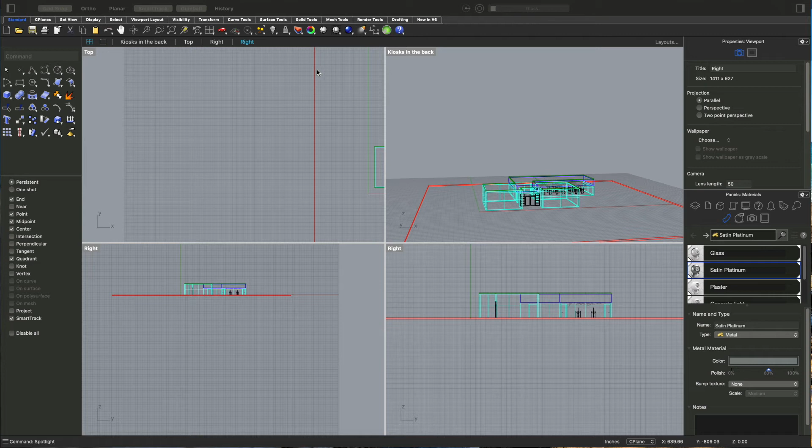All right, so let's do the next part of the gallery. I've got my windows set to show all of my orthographic views so that I can see everything. I'm going to start with the basic spotlight pattern in the back, and then I'll do the fabric overlay.

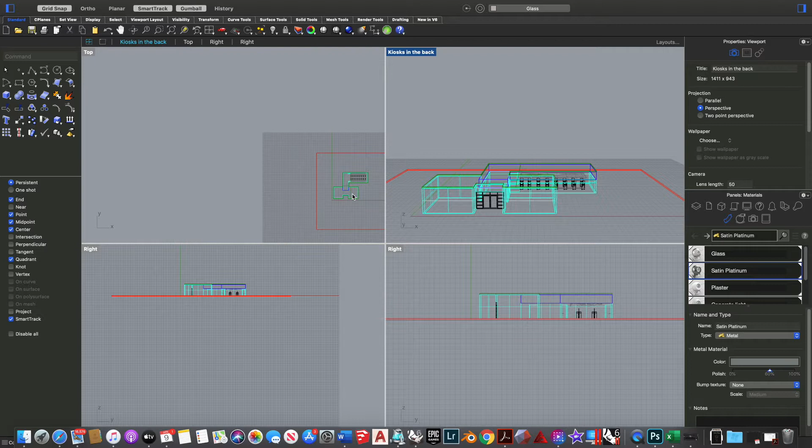So from a top view, I'm going to go ahead and hide everything by selecting it all. Then I'm going to make my spotlight, and bring everything back and move it into position. Spotlight, we type it, and we can adjust a lot of things later on if we want to.

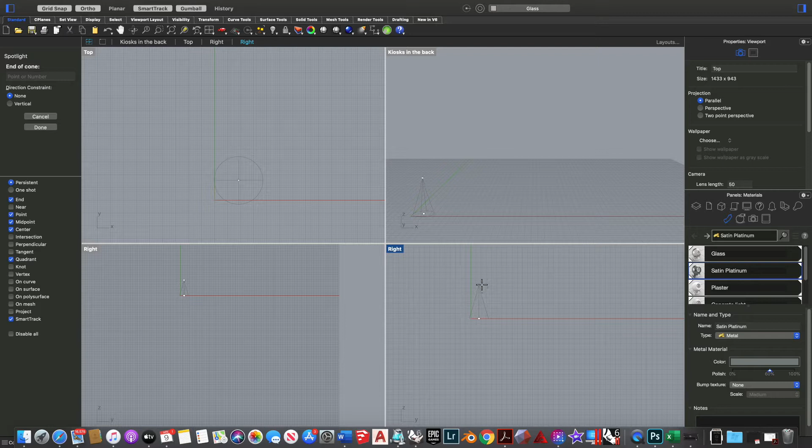I'm going to drag it out a certain distance, making sure ortho is turned on - up here for Mac, down here for PC. Switch to this view so I can get a straight forward spotlight. We can see that shape of it because we're in wireframe. If I click on it, now I can rotate my spotlight. If I turn ortho off, I can kind of tweak it a little bit down.

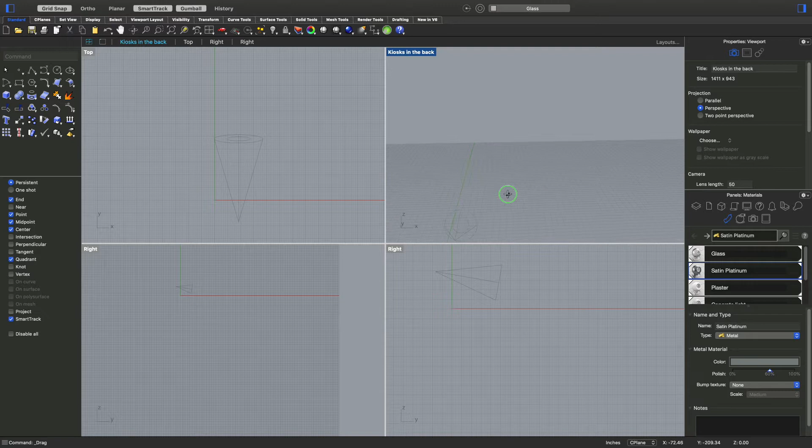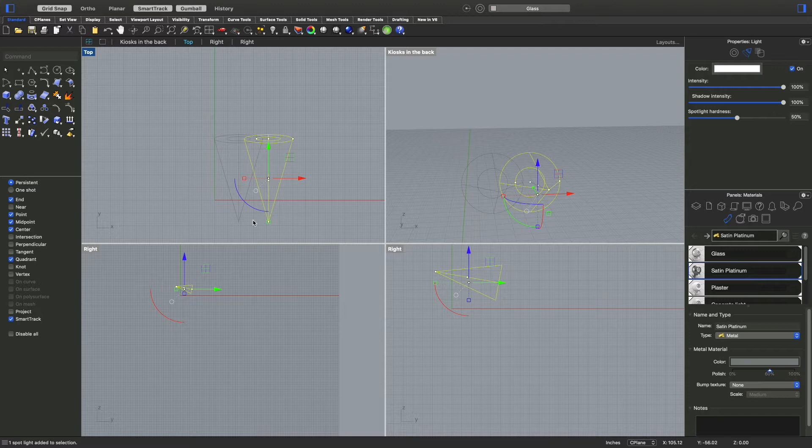Looking at it in perspective, now I want 3 of these, and I want them to cross beams. So I'm going to copy and move with ortho on - I just hit shift to make that happen - and put it about that far apart. Then I'm going to mirror this one over so I know it's the same. I'll select it and type mirror.

Go to my point here because my snaps are on. With ortho on, it should flip nice and straight, and click. Then I want these beams to cross right there, so I'm going to select this one and use my gumball to rotate.

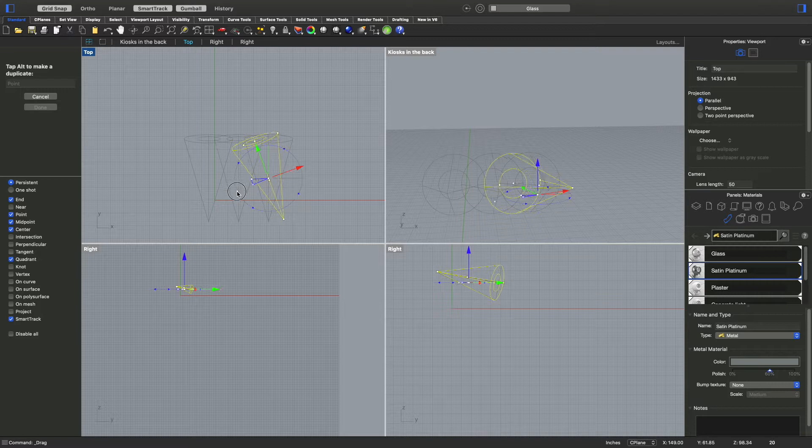I guess I could just delete this one - I should have mirrored that one afterward. So now I'm going to move it over. I want those circles in the center to overlap. Those are going to be kind of our hot spot.

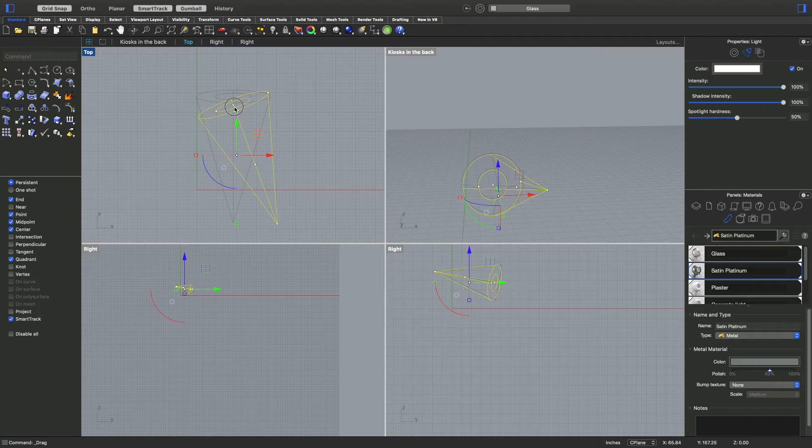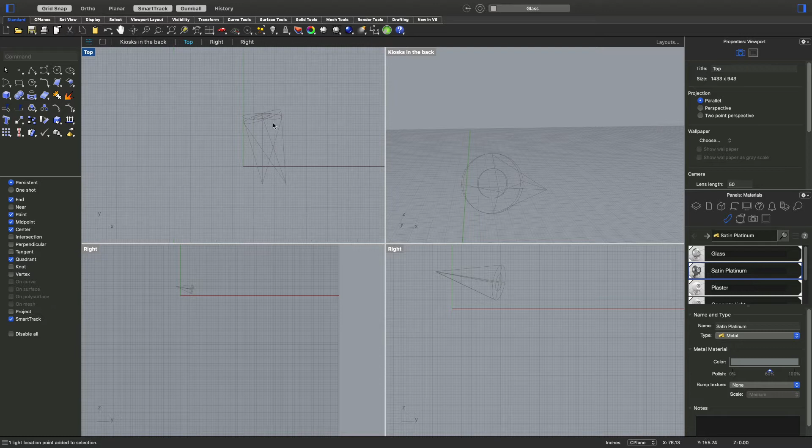I'm just dragging this single point by clicking, then clicking on just that point, and then I can move it because I want the distances to be the same. If I click on this, I can move these in to make it a really narrow focus, which later on I might want to change. We'll see how it works when we render it.

Now I'm going to mirror this over. This base point right there, and click.

While I've got them here, I'm going to go ahead and change the colors. Click on one, and then under properties - so properties looks like that right there - my intensity is way up.

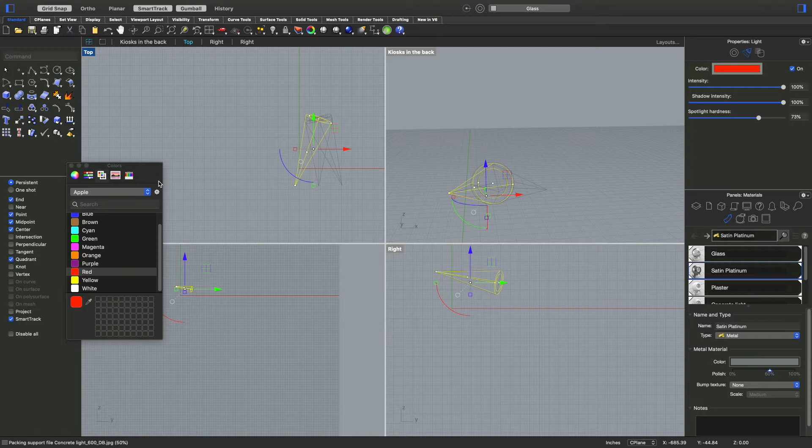I'm going to go to web colors here, basically, or just primaries. I'm going to do red, green, and blue. This one I'm going to make red. This one I'm going to make blue, I think - there's an order to it, I don't remember what it was, but we'll figure it out if it's not working. Since it's RGB, why don't we just do red, green, and then blue here. So that's blue, that's green, and that's red.

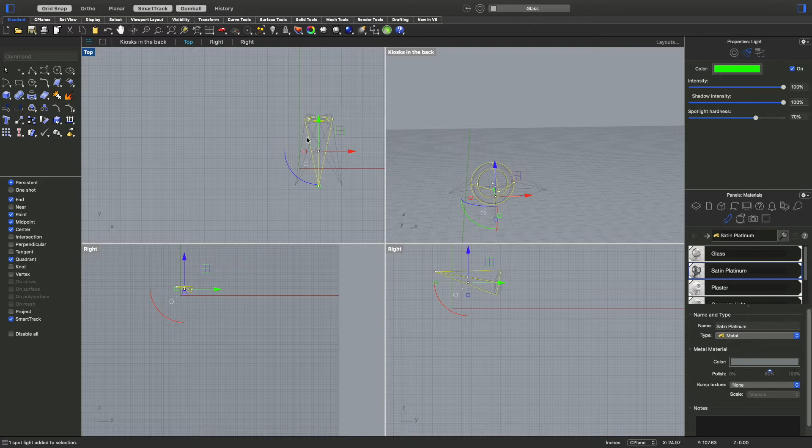All right, so let's now select these and put them on a new layer. I'm going to call this layer LightEff. Change the color, make it that green.

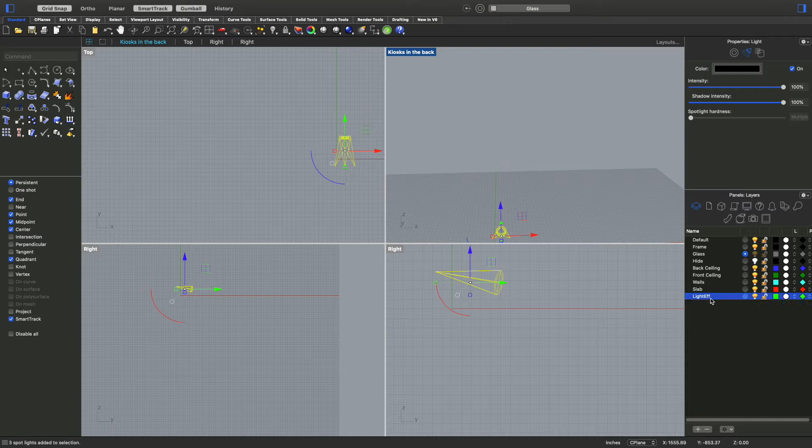Got to remember to move them to that layer. So select it all, right click, and move objects to this layer, or copy objects to the layer - I think that's what it says on the PC. Something different though.

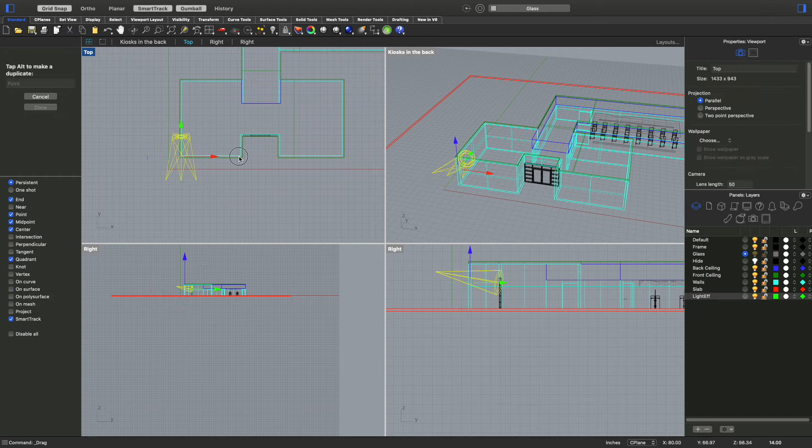All right, next we're going to bring everything back by right clicking there. From our top view, select these 3 objects, and I'm going to move them to the back of the gallery. Rotate - whoops, I'm going to type 45. Oops, 90, sorry. Oh, and then 180 to flip them all the way back around. Okay, there we go.

All right, so I kind of want them hitting the wall, and then I'm going to actually scale them in some.

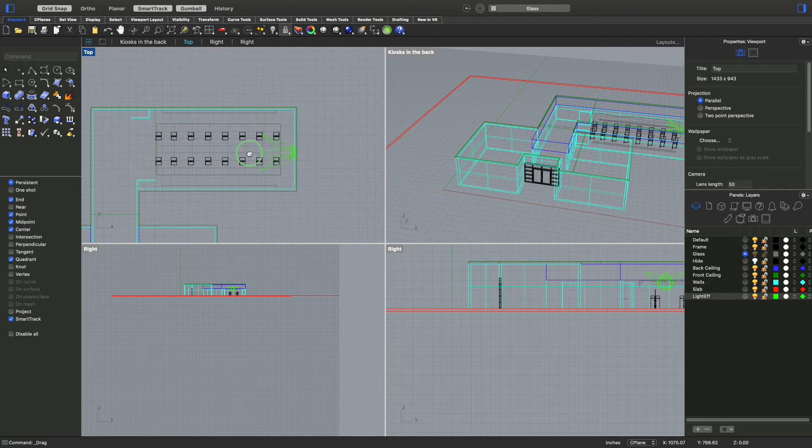All right, now I'm going to look at them from the front view because, yes, we can see that they're way up in the ceiling here. So let's select these and move them down to about right there.

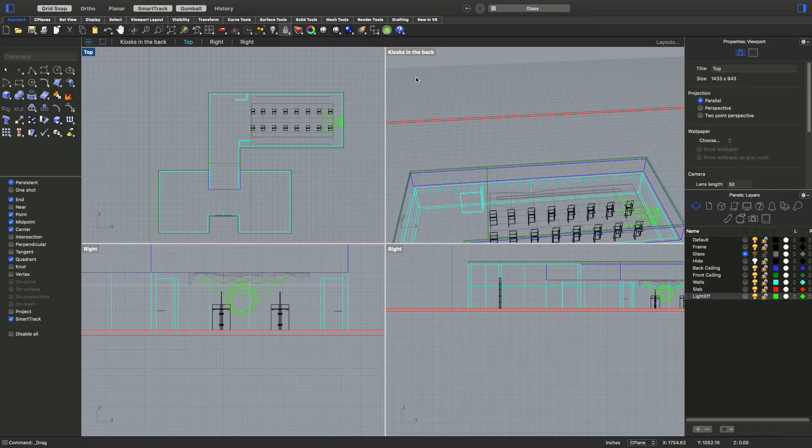Okay, awesome, so that's making those lights. Let's go ahead and see how they look. I'm going to go to my kiosks in the back view, to my camera here, which I've got set up as a view right there. I can just manipulate it.

Oh, and I realize I don't have this on a different layer yet, so let me just fix that real quick.

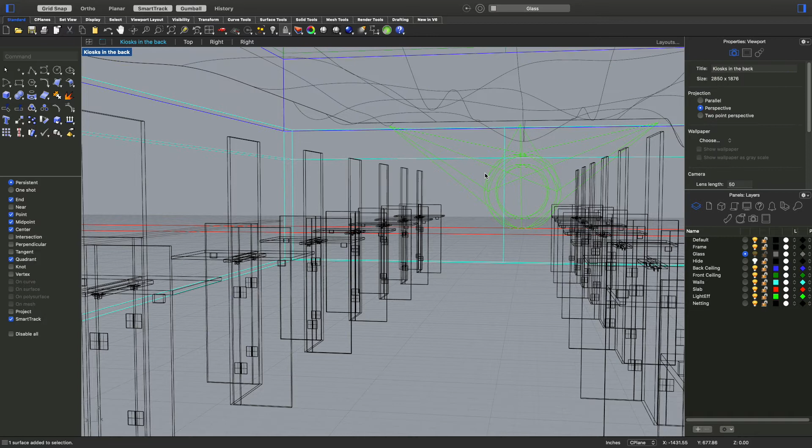All right, now let's switch to rendered view and see what it looks like. And it does look like we have a white light pattern back there.

Okay, I'm going to go ahead and try rendering this and see what it looks like. Let me just show you my render settings real quick, under render properties here. So we can lower this down, maybe do 100 DPI, and background solid color's fine.

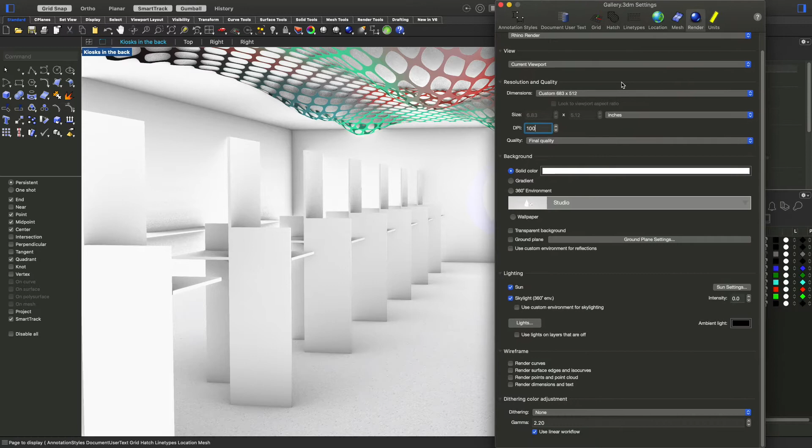Ground plane, we don't need that because we already have a ground plane, so I'll turn that off. I'll leave the sun and skylight on. All right, let's give those settings a try.

Okay, so after rendering it, I noticed we had some issues to fix. I came back in and decided to change some parameters, so I moved the lights closer together and scaled them in a bit individually. Then under properties I changed the intensity down a little on the red, shadow intensity to a midpoint, and spotlight hardness I put all the way up, which makes it almost like a focused light.

Then we want to make sure we've got the green at 100% intensity and the blue. You've got to play with the intensities a little to get the effect you want, but shadow intensity at 50 and spotlight hardness all the way solid there.

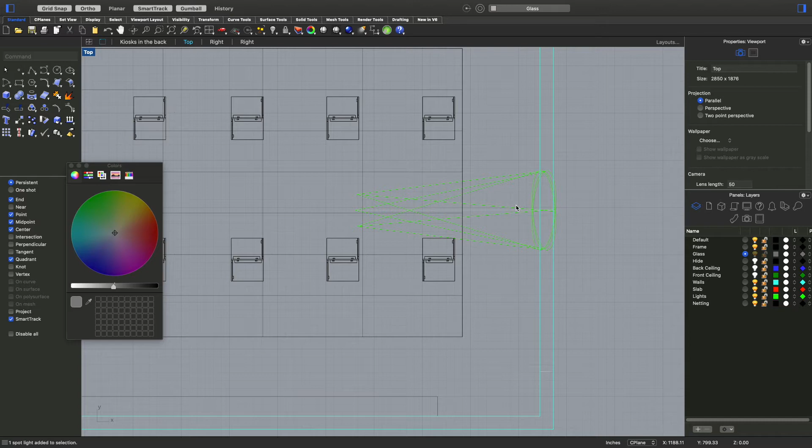A lot of these lighting settings that we're talking about do carry over to different programs, which is good, to make you think not just about using Rhino, but using any other software in the future.

So let's go ahead and add a little bit more lighting. I'm going to add a point light and put it right here at this end point, then move it to the middle here, middle-ish.

Then I'm going to go to a right view, and I want to make sure my point light shadow intensity is a little bit lower so there's more gradation in the shadows.

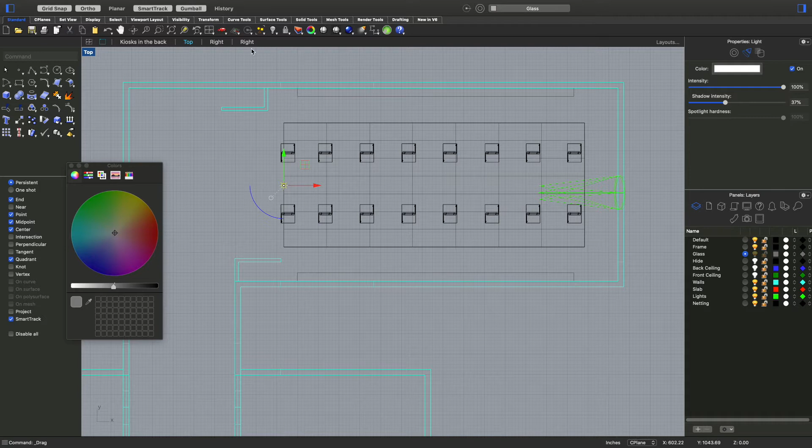Let's go back to a top view—sorry, let's go to a right view here. The other thing we want to make sure is that it's below the level of our draping net. We could put some more up in the net for cool reflections, but I'm just doing the basics here.

Now I want to copy and paste this, so I'm just going to go Command-C, Command-V, Command-V, and that's probably enough. So I'm going to move one to about here, and move one back this way a little bit.

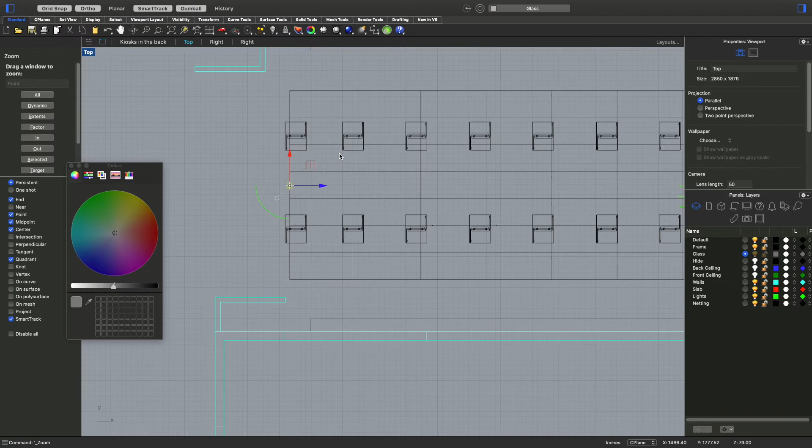Hold on a second, I'm getting a little... There we go, my Zoom was acting up. Sorry about that. Okay.

So I've got these three lights, and I'm looking at them in relationship because I want to leave some darkness over here to allow this lighting effect back here to work. So for now, I'm going to try this out.

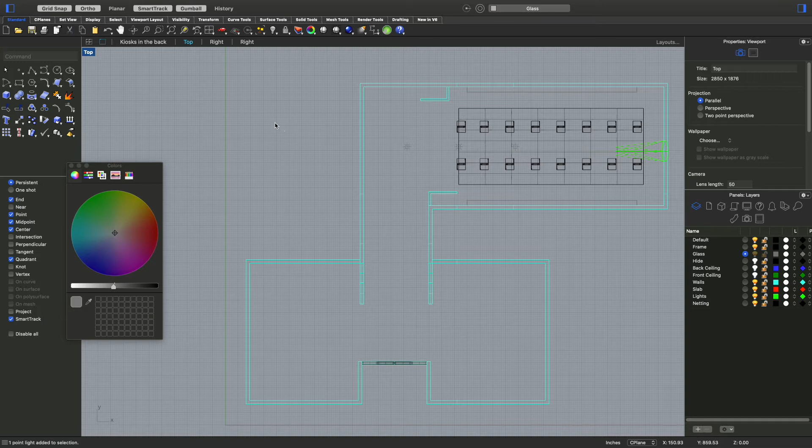So I'm going to go back into kiosks in the back—actually, I've got my named view here I set.

Okay, so the next thing I want to do is come in and do some render properties. I'm going to make sure that I've got no environment set under my 360 environment, and I'm not going to use a ground plane. I think these are all pretty good.

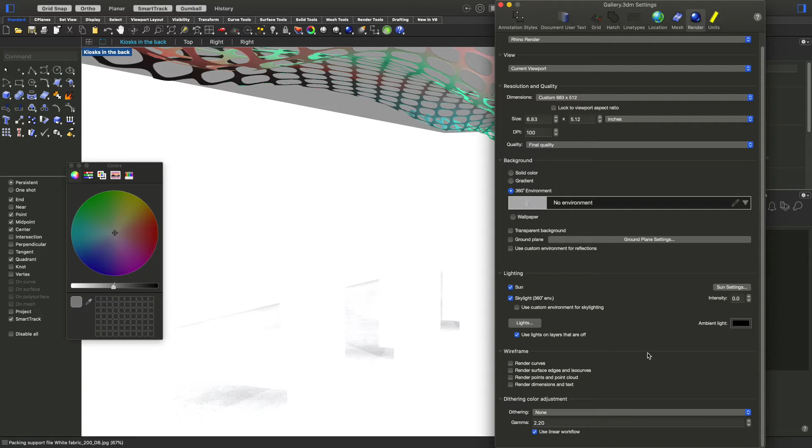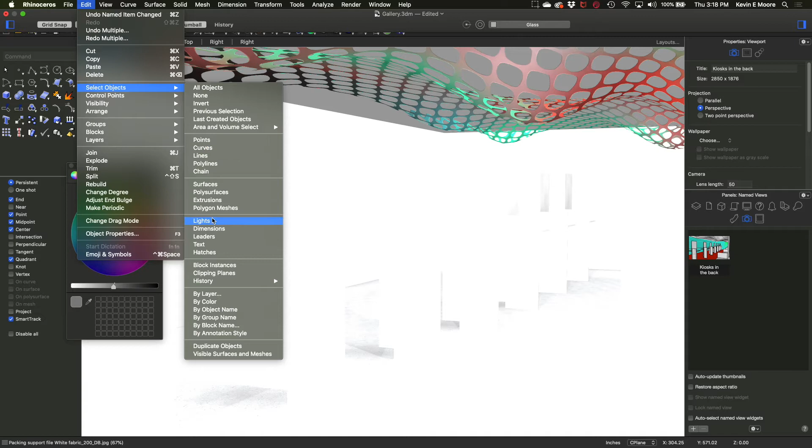Then the other thing I want to do is go up and go Edit, Select Objects, select my lights—right there—and then go into my layers here and move my objects to this layer. So I have all my layers with the lights on one layer, and I can turn them off.

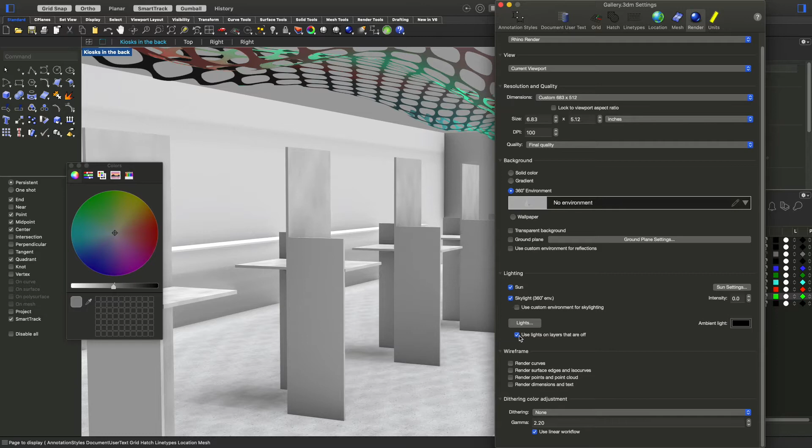That way, under my render settings, I can also use lights on layers that are off when rendering, and still maintain a little bit of capability of moving through the space here.

Okay, so let's go ahead and give it a render and see what happens, and then we'll move on to the next part.

All right, I can see here it's going to be all blown out. So now I'm going to just go ahead and stop my rendering.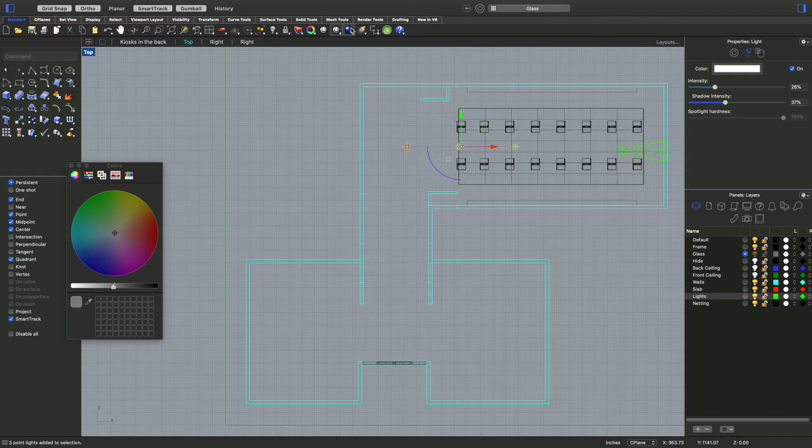Then what I'm going to do is go to a top view, turn my lights back on, and select the three lights I've got here. Bring the intensity down, and go back to my view.

And this time I'm just going to do a render preview. You can see what happens when you get that one light inside of the netting there—it's kind of cool looking.

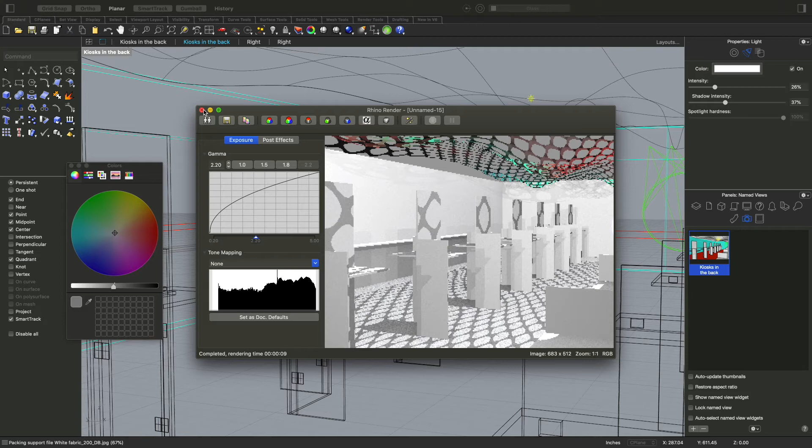All right, so I think I could still bring down these lights' intensity a little bit more. Let's do another render preview.

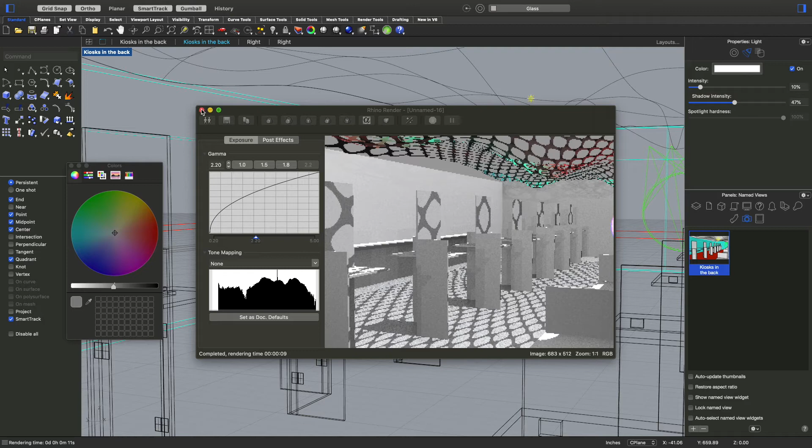Okay, I think that's going to be good enough for now. So that's lighting this space up. The next thing I want to do is go to this portion and make the drapery.

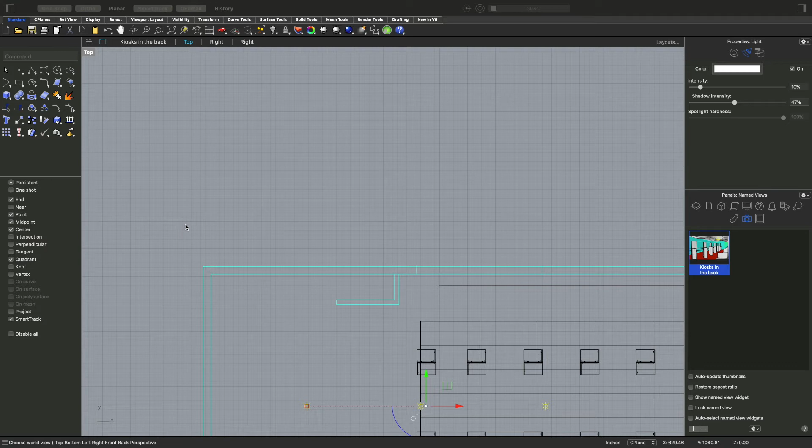So to make our drapery, what we're going to do is create a pole by drawing a line. I'm going to go from this point to this point, then type pipe and select. I've already got this selected, so pipe, then a radius of 0.5, enter, and enter again, then enter one more time to make the pipe. If you didn't have the same settings as me before hitting enter each time, just check my settings.

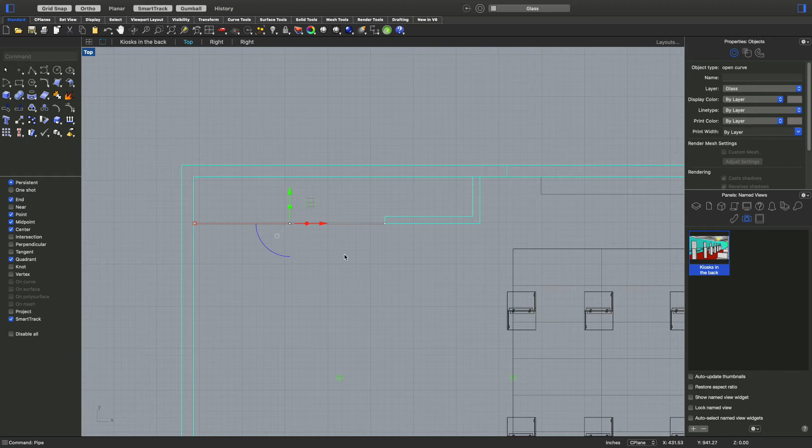And then I'm going to go to a right view, and now what is selected is the line there, so I'll just delete that curve. Now I've got this, and I was lucky enough to get it right on the point there, but you might have had a problem with that. If so, you can just lift it up and down.

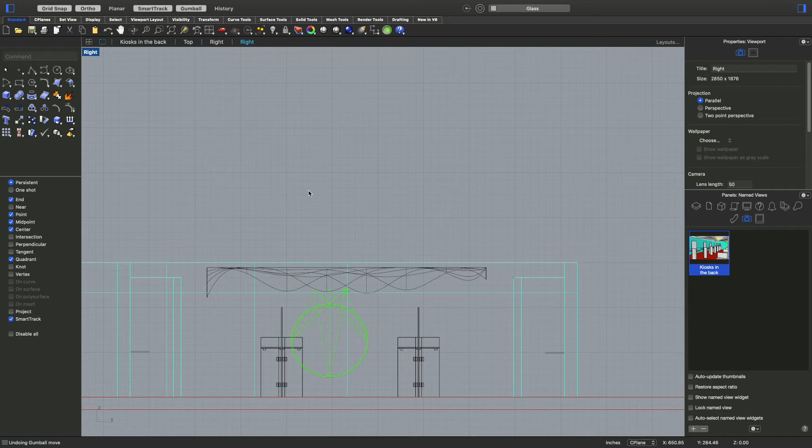Next I'm going to go ahead and turn off my lights. I've also got my back ceiling and front ceiling turned off here too, and I'm now going to turn off the netting layer.

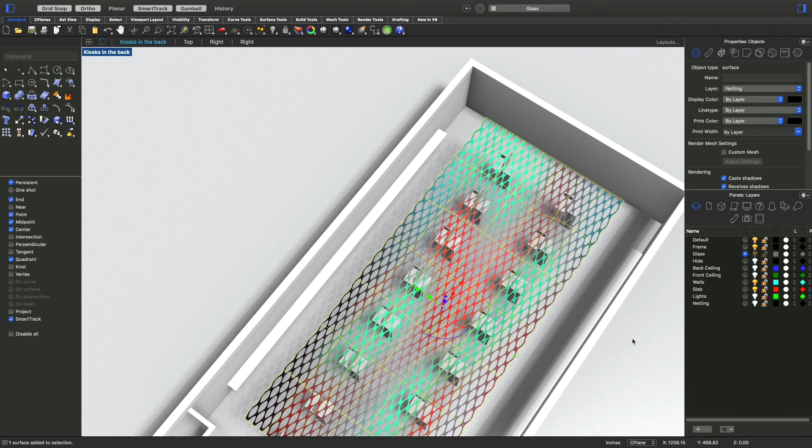So this is our pole that we're going to use to drape over. Basically, to drape, all you got to do is type drape. Then from a top view, you have to be in a top view, and you're going to basically draw a rectangle. You can make your own spacing up, 20, whatever you want to do. Try different ones, and you'll have different effects.

So what this command does is it basically just drops a surface over. Those of you who saw the video I made about using drape previously will be aware of this. I'm going to just go from this point here and try to make it kind of symmetrical - a long, narrow band, and then release.

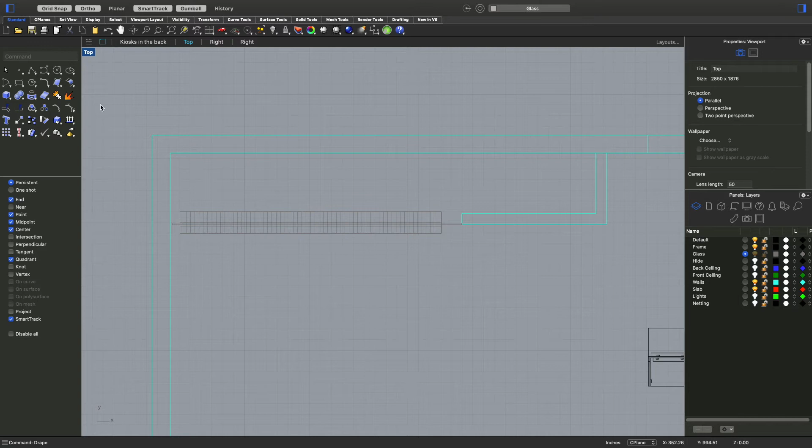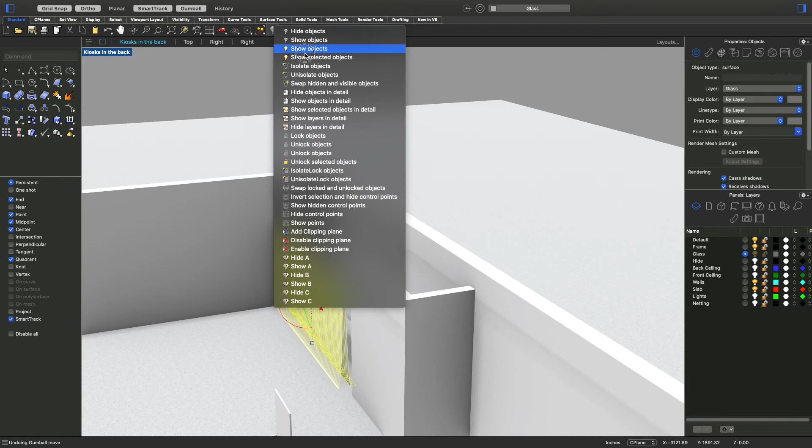Go into perspective here, and you can see it's not precise as far as its location onto the pole. It doesn't drape right over the pole, but I don't really care about that. So I'm going to isolate it, then go into shaded view here.

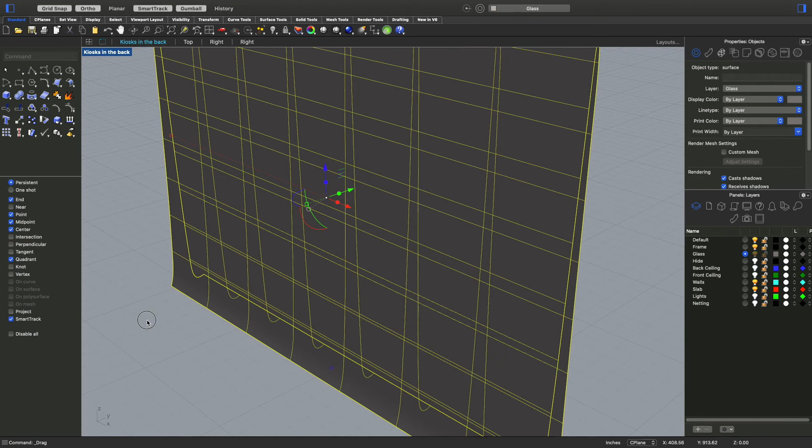And I can rebuild this because it's a surface with 10 by 10, so it has less control points. Then I can stretch it, lift it up. Probably needs to be - that's probably good. It's actually fine to be almost on the line there.

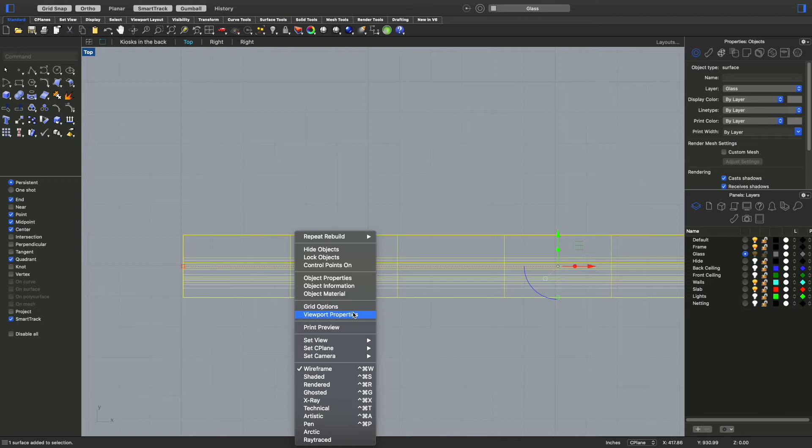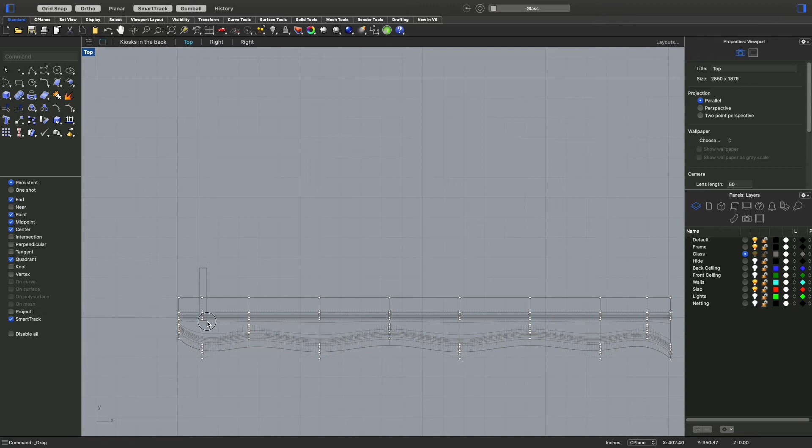And then I can go to a top view on it. For some reason it's not quite symmetrical, but I can turn my control points on. Then I can grab from left to right, grab from left to right, every other grouping here, and pull them out. Can even do it the opposite over here. Just be creative - so I'm grabbing these points, and you'll see what it does if you don't already guess.

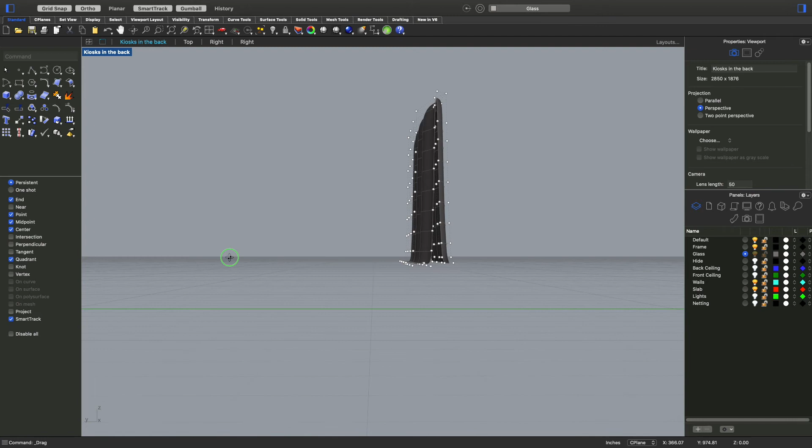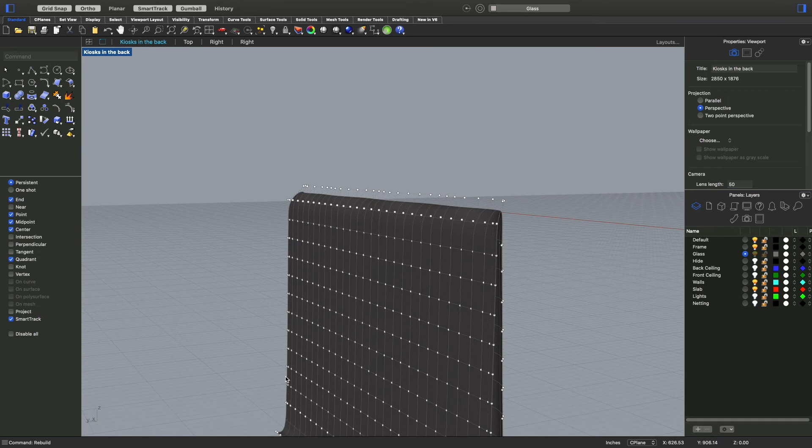It kind of starts to make the fabric wavy. And if that's not enough control points, you can rebuild again and maybe make it 30 by 30. Then you can come in and actually do a little bit more detail work, pull out different sections to kind of manipulate the fabric.

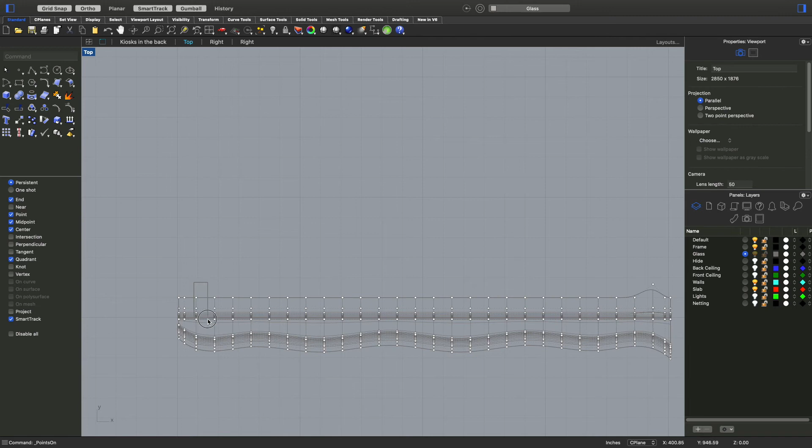All right, so I'm going to keep playing with it for a minute, and then once I'm ready, I'll come back and we'll do materials on it.

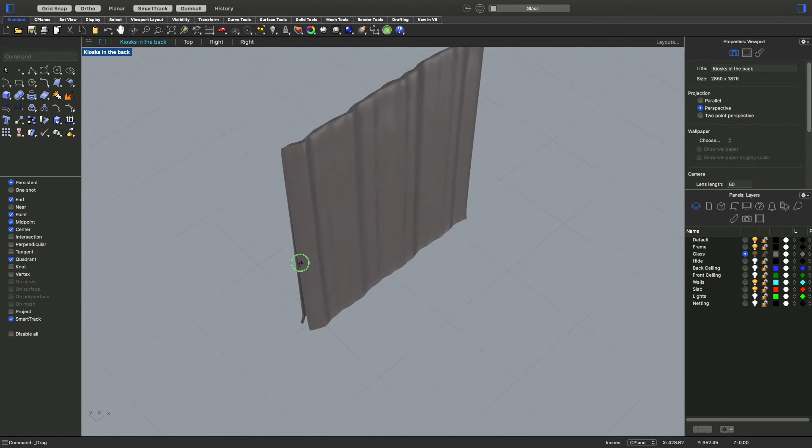All right, so now I've kind of been forming it a bit. I'm going to squish it in some. And I think I actually like this side better, so I'm just going to flip it 180. Then let's go ahead and show all the objects, right-clicking on the light bulb.

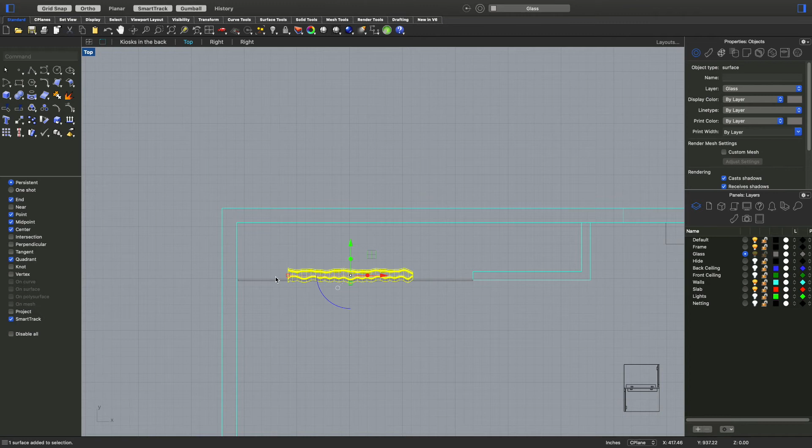Okay, so from a top view here now, let's do a few things. Let's squeeze some of this into smaller fabric sheets, maybe even this way some, and then copy them around.

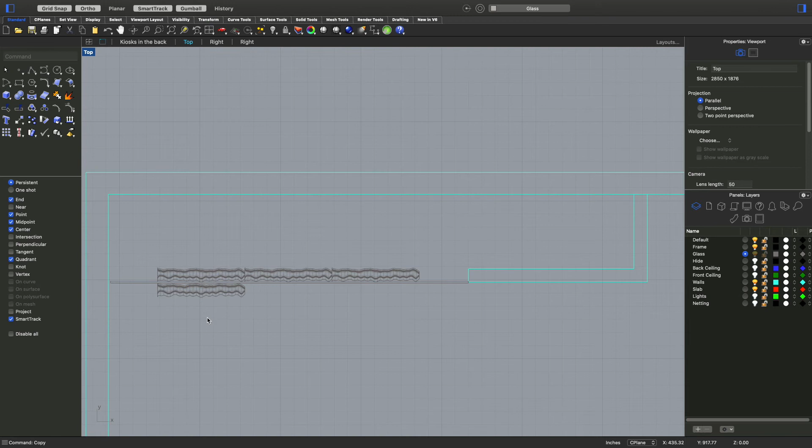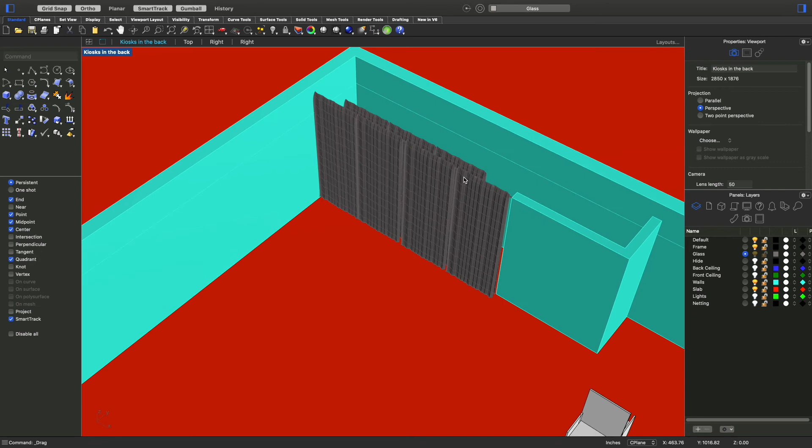And I'm just kind of doing that haphazardly - you might want to spend some time making it look cool. And then I can change the scale again on some of these, even make some float in space. Yeah, it just looks like curtains, but you know, you get the idea. You can make something far more interesting in just a couple more minutes.

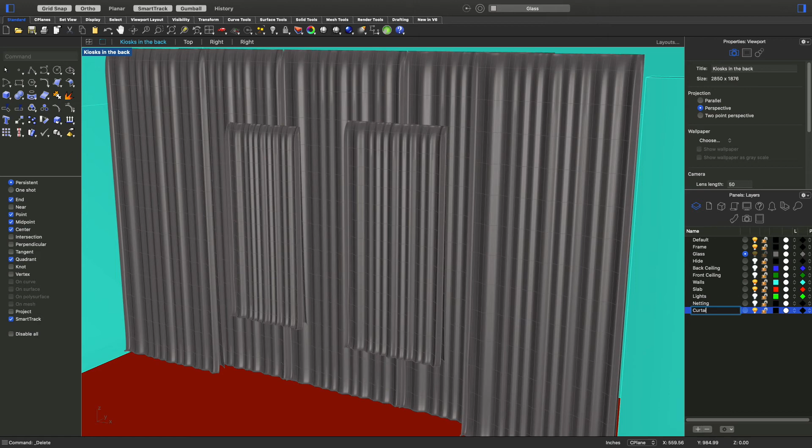Okay, so now I'm going to add a new layer and call it curtain - sorry to minimize the artistry, but that's what mine look like. So now select them all and move objects to this layer.

Should we make it a fun color? Yes, we should.

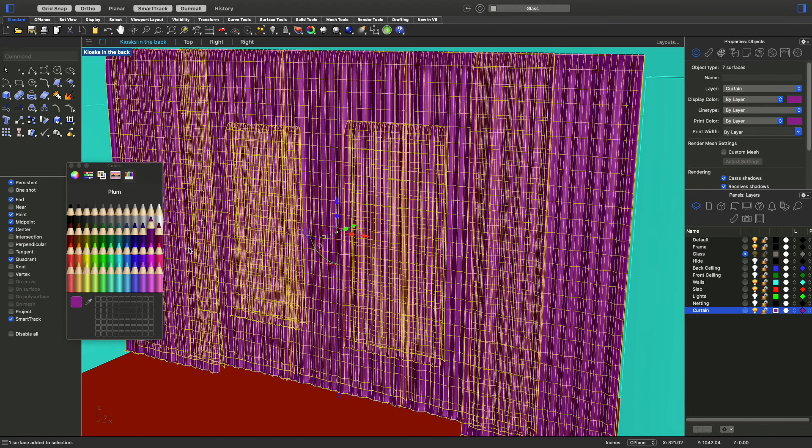Okay, cool. So now we want to add a material to this.

The way I'm thinking we do this is we just use one of the existing materials and manipulate it a little bit. So let's go to our material library, add a material, import material from library, and under textiles here you should have a bunch of different stuff. If you don't have all this stuff, you need to type the command download library textures, and it should download all those textures to your computer. Okay, import from library, and then textiles.

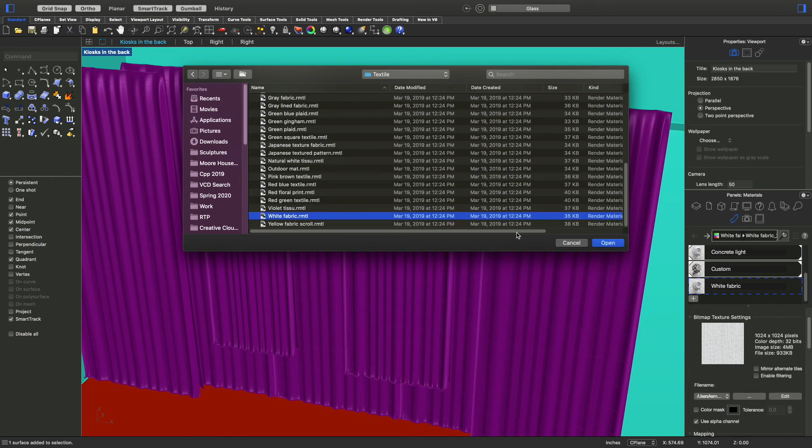I'm going to come down here to white fabric, open it up, and click on it. Click on the fabric, click on edit, and then it brings this up. Save this file to your computer, and then we're going to open it with Adobe Photoshop.

Okay, and then from here all I want to do is go to 3D. Or go to filter - oh, it's not available. Well, let's save it as a JPEG.

So I'm going to just try this out. Save it as a JPEG, save it to your desktop or wherever. Close it down, or just close the file so we don't have to close Photoshop.

There we go - filter 3D, generate normal map. Or actually, bump map, I'm sorry. Cancel. For this one we want, because it's Rhino, we'll do filter 3D bump map or height map.

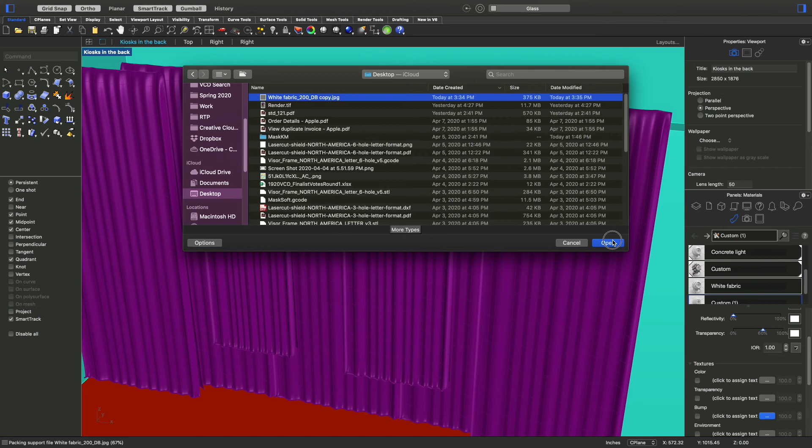This time I'm going to add a custom material, okay, and then I'm going to increase the transparency on it quite a bit. I'm going to go to my bump map and assign that file. Open. Okay.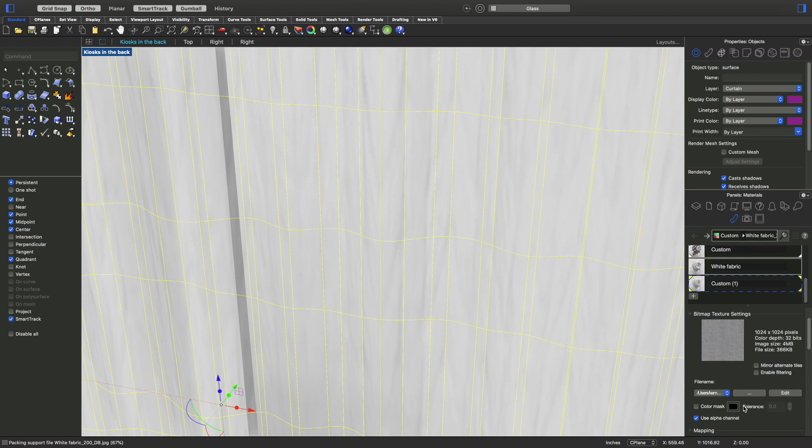Let's go into render and see what it looks like. You can see the texture on it might need to be tiled up a bit, so we'll come back in here and repeat it 10 by 10. Yeah, there we go - it's a little bit more subtle that way.

I did that by going into the dot dot dot - or no, not that, sorry - clicking on white fabric here, and that brings up this repeat, 10 times by 10 times. Okay.

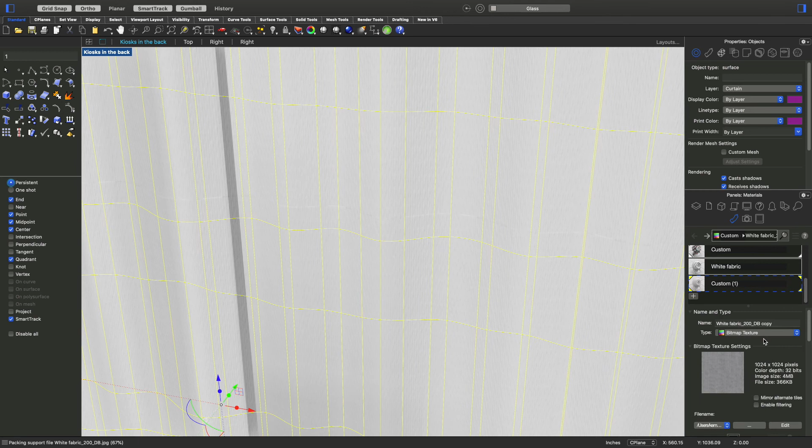So then let's click on the custom material again and try a different color. Okay, because that's why we've got a color now assigned to something other than the bump map. So this is actually very similar to how you're going to be texturing things in other programs too - the color map and the bump map are different, and that's how we created this custom color.

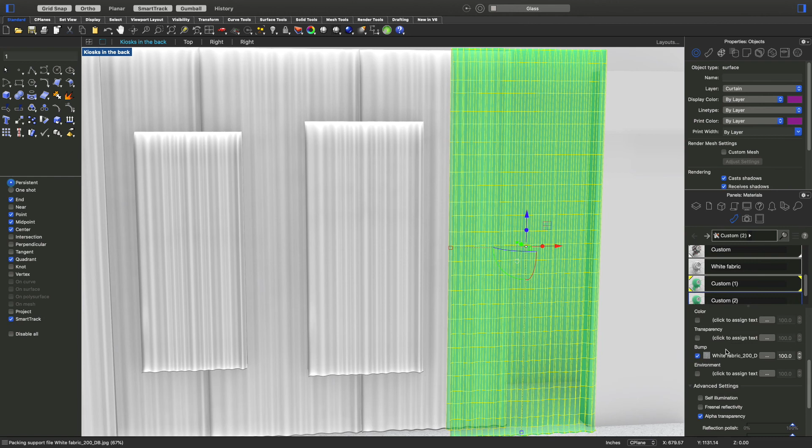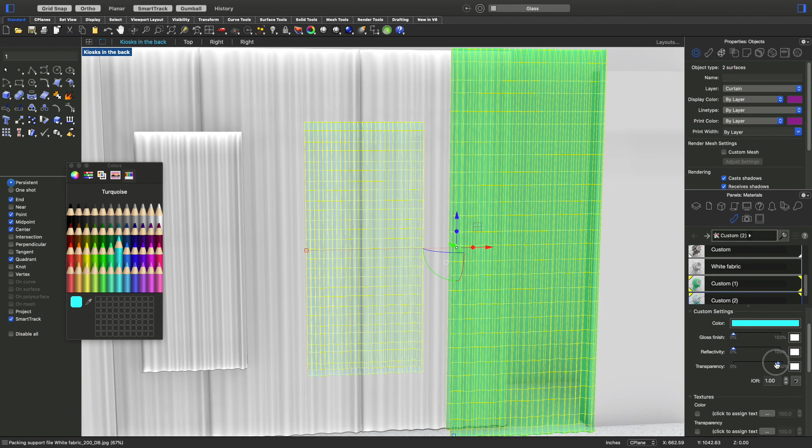The nice thing is I can just duplicate this, and then change the color on each one pretty easily and still maintain that same texture configuration. I think the transparency should be pretty high up, actually - that's too high. Okay, so let's apply the rest of the colors and we'll look at how it renders.

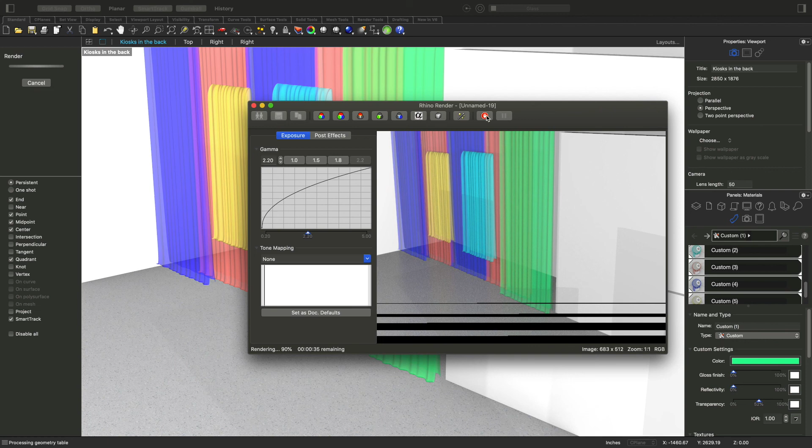All right, so this is just about rendered. You can see it's got a little bit of texture to it. I might have overdone it with my waviness on the fabric - we probably want a little sleeker look to it. So what I'm going to do is just go ahead and stop this. That's kind of the way we do fabric and manipulate materials, and the difference between bump maps and different types of rendering options.

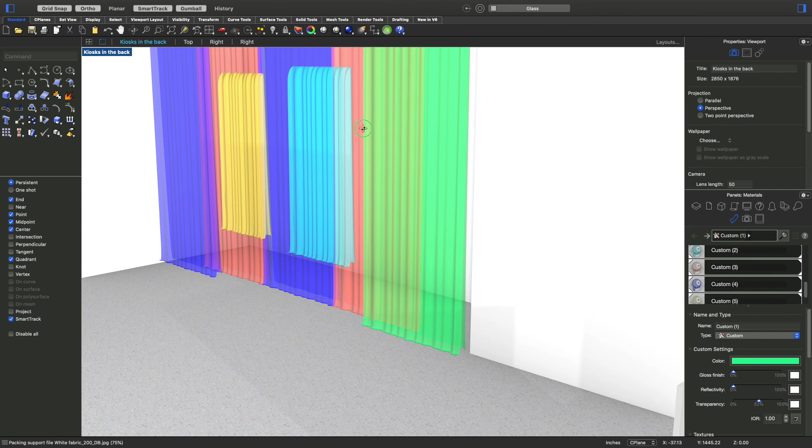The last thing maybe you want to be interested in seeing is if I go into my camera view, switch back to my kiosk view here, and then go to my layers. Let's turn back on the ceiling curtain, or the netting, I'm sorry.

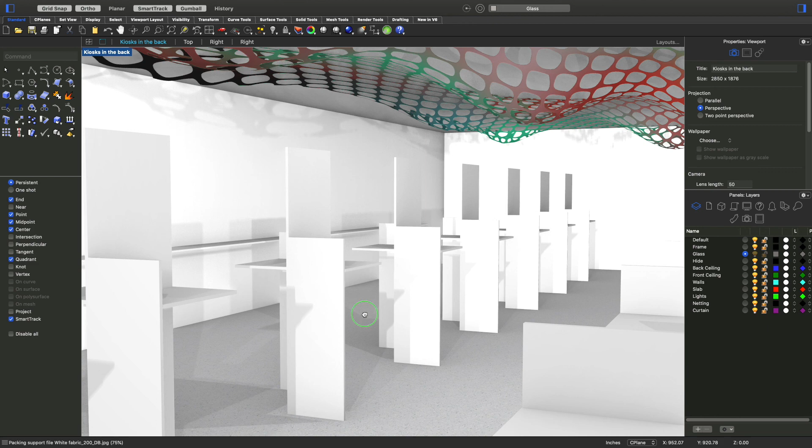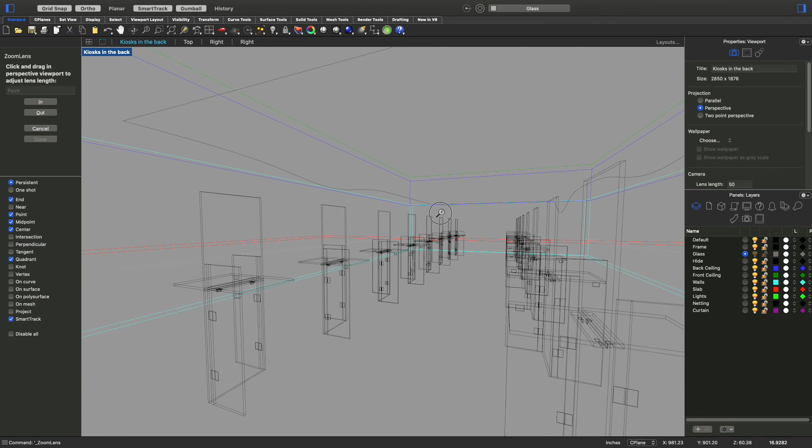I think what I want to try to do here is change my camera's view. So if I go to set view, set camera, and then go to adjust lens length here, as I zoom out I get a wider lens for my camera. You see that? So now it gets a little squirrely, so you don't want to do this all the time.

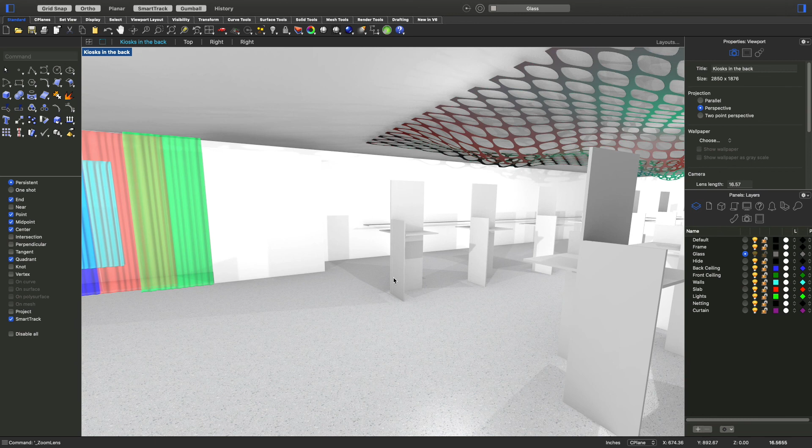But you can almost fisheye and see a bunch of my view all at once. So let me see if I can rotate it a little bit, and I'll go ahead and give that a render and see what happens.

So that's it - that's probably the last thing you wanted to see as far as some ideas for how not only can you create the space, but you can also manipulate the camera lenses so you can change the vantage point, have really wide angle views, really narrow angle views. So those are all parameters that can also be overlaid with different programs, and I think will be beneficial if you can expand on them.

Again, we're rendering with Rhino here just to keep it basic. These fundamentals would also lend themselves to other rendering engines. Thank you very much.